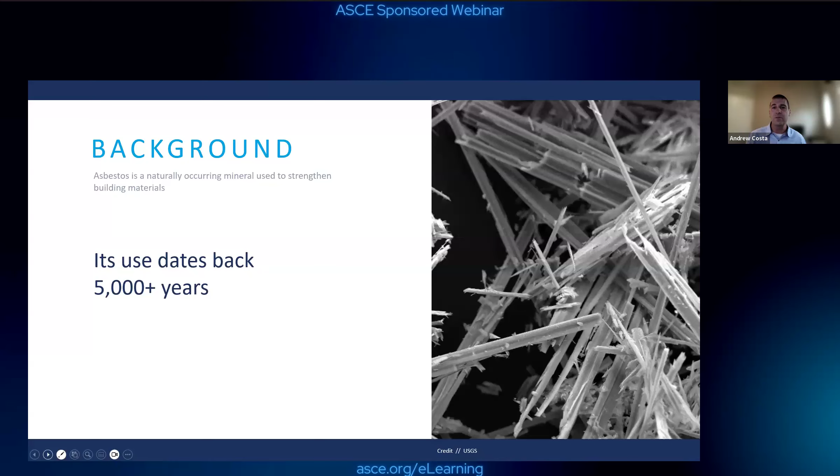Let's go through some background of asbestos cement pipe, or just asbestos in general. A lot of people aren't really aware that asbestos is a naturally occurring mineral used to strengthen building materials. It's been around a really long time. Humans on this planet, I'm not sure about aliens, but humans have been using asbestos about 5,000 plus years. There was a big increase during the Industrial Revolution. As we started ramping up with a lot of buildings, we really started increasing the use of asbestos as a building product.

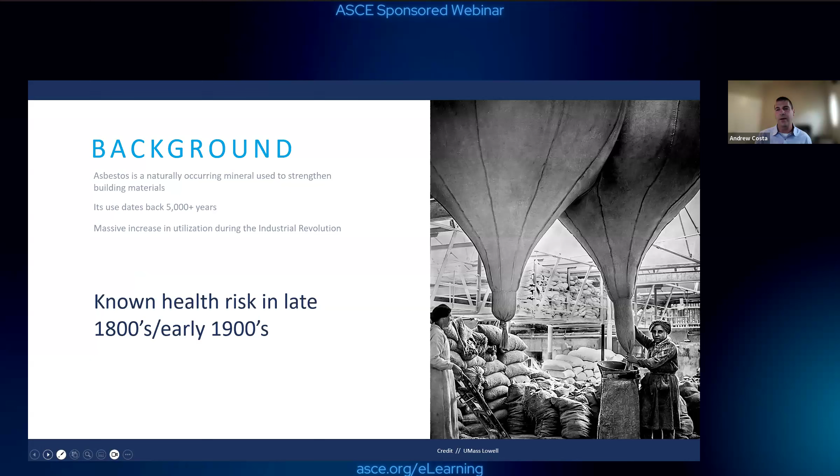Around the late 1800s and early 1900s, we started noticing that it had some negative health things associated with it. So we started figuring it out back then. But as its use continued and ramped up, it was kind of at its peak that we really started fully understanding and studying exactly the negative health aspects of asbestos.

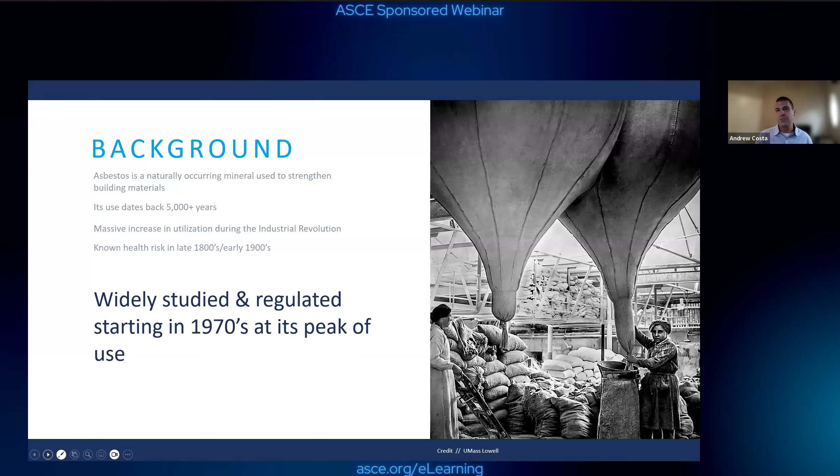So as it peaked, that's when we really started regulating it. If you grew up around the time that I did, these are very familiar terms as it pertains to asbestos. So asbestosis, mesothelioma, and lung cancer, these are all major health consequences that are direct consequences of asbestos fiber exposure, some of which is short-term exposure and some of which is prolonged exposure over the period of several years. So some pretty negative health consequences associated with the material.

Most people these days have a very strong connotation with asbestos being a concerning material. The challenge here for us on the infrastructure side is that about 15 to 18% of our pipelines in the US and Canada are made out of asbestos cement. So that represents over 600,000 miles in North America.

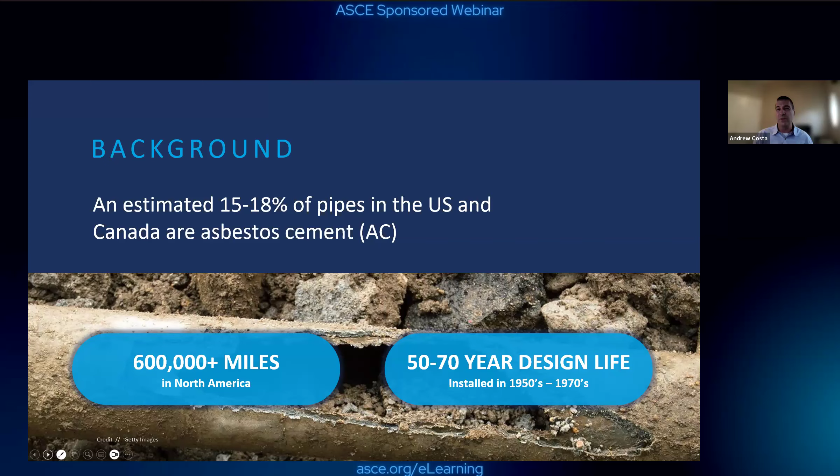And with about a 50 to 70-year engineered design life, these pipes were, again, a lot of installations during the Industrial Revolution. So when you start getting into infrastructure building in the 50s, 60s, and 70s, with a 50 to 70-year engineered design lifespan, we're there right now. And a lot of these pipes are far past their useful life. Some are in very good shape, but most are nearing the end of that life.

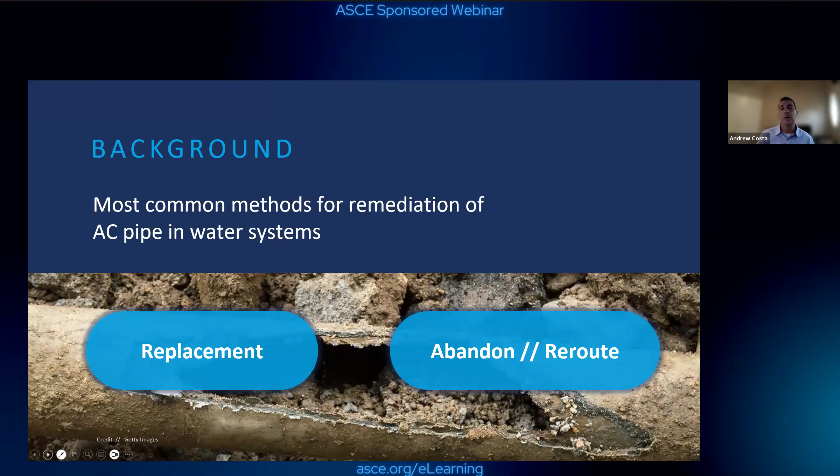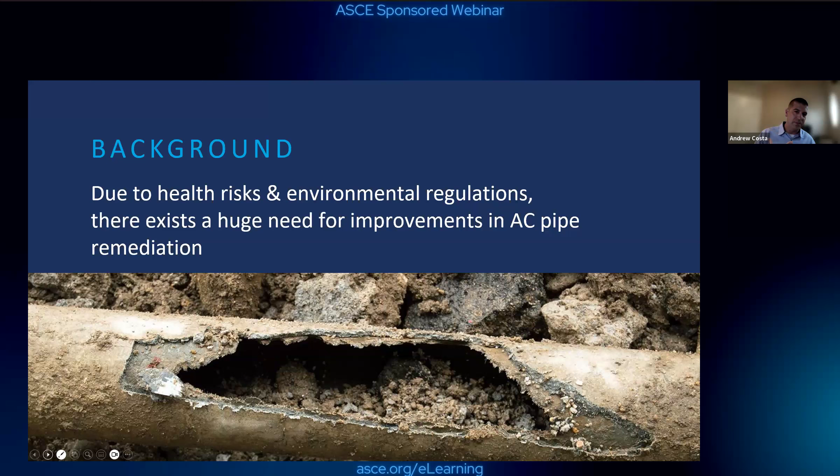Traditionally, up to this point, we've historically handled asbestos cement pipe by either the replacement method or by abandoning these pipes and rerouting a new line. But because of the health risks that we talked about and a lot of environmental regulation out there, we've got a lot of inventory still in the ground. There's a huge need for the improvement in how we remediate our AC pipes. Just like Azuria's thesis, as far as trenchless technologies, we're trying to infuse this trenchless concept into a historically dig and replace history.

So from the regulation side, there is a lot of regulation that comes with asbestos and asbestos cement. From the federal side, you have the EPA, and as an extension of the EPA, you have NESHAP, and we'll talk about them in a minute. We have the Department of Transportation involved when we are moving these materials from one point to another. And then obviously when we're dealing with worker safety and workplace safety, we're dealing with OSHA.

The EPA delegates the authority of asbestos governance and legislation to the states. And from there, what the states do with it is a little bit different depending on which state you're talking about. A lot of states will just take that delegation from the EPA as is. They don't make any changes and they just go about their business regulating the material. They do that through groups like DEQs and DEPs.

There are a lot of different spins on what environmental legislation governs asbestos and the implementation of NESHAP. So some states just take that delegation and they run with it. Others add on layer upon layer of additional regulation that is there to deal with. So some important terms to know.

We talked about NESHAP. So NESHAP is the National Emission Standards for Hazardous Air Pollutants. This is the regulatory agency that manages and regulates air quality, specifically with asbestos. If you think back to where asbestos was primarily an issue, it was in vertical buildings and structures. So primarily it's governed as an airborne or an air quality issue. Again, this is managed by the US EPA under the NESHAP.

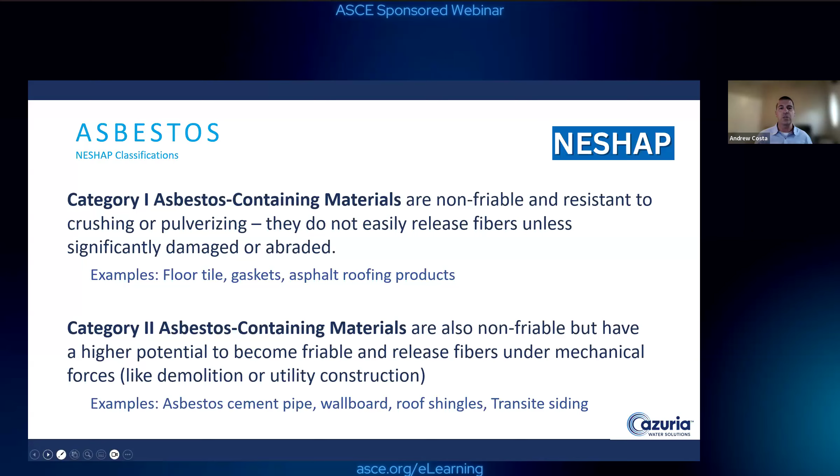These are non-friable materials if you don't mess with them, but they have a higher potential to become friable and release fibers once we start doing construction activities to them. So these are things like transite siding, shingles, wallboard, and for us, asbestos cement pipe materials.

So the NESHAP has very strict work practices when it comes to minimizing or preventing the release of asbestos cement fibers. And that doesn't matter if you're talking about category 1 or category 2. So anything that has been fractured or broken, especially if it's category 2, NESHAP calls that regulated asbestos-containing material, or RACM. And again, it's regulated under the asbestos NESHAP.

If it has two things: if it becomes friable, it's regulated, but it's got to be over 260 linear feet. And I think that's generally within a calendar year. So if you're just remediating a 5-foot section of a pipe for a point repair, that's not going to fall under the regulations of NESHAP. You've got to have workplace safety because you're dealing with hazardous materials. But as it pertains to NESHAP, once we get above 260 linear feet, that's where these regulations kick in.

So if you kind of want to understand, is this material regulated or not? Is it friable? Yeah. Is it over 260 feet? Yeah. It's regulated, right? We call that regulated asbestos-containing material, or RACM. Okay, what do we do about it, right? Let's talk about what the EPA has approved as far as solutions for remediating AC pipes.

On the rehab side, these are trenchless methods. These are EPA approved. We can do CIPP, we can do slip lining, or we can do spray applied pipe. These are partially not disturbed because we're not messing with the majority of this line. We partially remove the ends where we have excavations, but these are trenchless technologies. These are things that the EPA very much likes.

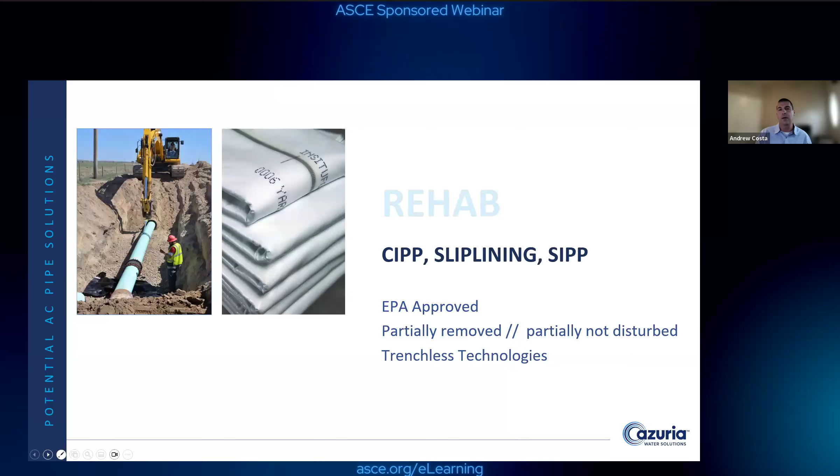So on the direct replacement side, there's a lot of things that come with open cut construction. And this is kind of the value proposition of trenchless versus open cut. It's very disruptive. It tends to be expensive. It does take a lot longer than trenchless technologies. There are a lot of social costs that go with this and a lot of restoration. These are all fundamentals to getting away from that direct replacement type of mentality.

On the grout and abandon side of things, again, it tends to be time consuming and costly. It does leave the asbestos in the ground, which is non-preferred. You're dealing with potential conflicts wherever you're going to lay the new line. Oftentimes, if you're moving that line several feet away or across the street, you're dealing with new permitting, new easement acquisitions. These are things that add to the process. They add engineering fees and time. The environmental results are not ideal.

And if you grout fill and abandon asbestos cement pipe, that's okay for now, but what happens in the future if you need to make some modifications to that area? What if utilities need to be changed or removed or moved? What if that neighborhood grows? There are always changes that we're experiencing. If you now need to cut that area, you can't snap cut it anymore. You're saw cutting through a solid piece of pipe. That is a very dangerous process that will release a ton of fibers in the air. So in essence, it just takes the problem and shifts it down the line.

So we're going to talk a lot about this CTPS process, and I want to give you a little bit of backstory as to how it came to be. It's got some roots in trenchless technology from the pipe bursting community. And the pipe bursting community had been seeking some assistance from the EPA for a number of years through what they were going to call an alternative work practice.

And they needed some alterations or some release from the NESHAP requirements because the process didn't meet all the requirements to the letter of the law. And because that process had been denied, it's not an approved process right now. And so we were on a project in Greenville, South Carolina. It was a shallow pipe bursting project.

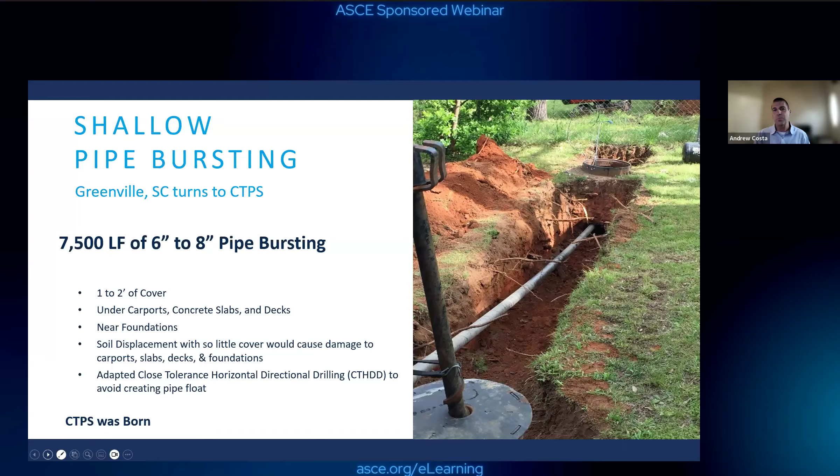So let's talk a little about, we call it close tolerance pipe slurrification. Unfortunately, there's not a more smooth version of how to call this thing. That's just what it's called. So we call it CTPS for short. There's a few things that I want you to understand before we dip into what CTPS is. So if you're tuning out or if you're multitasking, I really want you to focus in on a couple key things on this process before we dive into it.

Number one, it has federal EPA approval. So it does have this alternative work practice to NESHAP that we had talked about that the other communities didn't have. This is the only EPA alternative work practice that exists. It's literally the only one. It does have an ASTM standard, and it does have installations in multiple states.

So what is it? What is CTPS? CTPS is the only EPA approved trenchless method for replacing asbestos cement pipe. It's a trenchless technology, right? That's what we do. It's actually very simplistic in nature. It uses a lot of very common trenchless ideas and equipment that's been around for a long time. So it uses directional drilling equipment and it uses bentonite drilling mud, very familiar materials in the trenchless space.

What it does is it combines the drilling mud and the asbestos, turns them into a slurry, and it pulls it to a pit where it's hauled away and can be disposed of. And what that does is it allows us to remove and eliminate leaving friable asbestos cement pipe in the ground. We can do that for pipelines that are 4 inches in size to 20 inches, and we can upsize at least one size and sometimes two, depending on diameter.

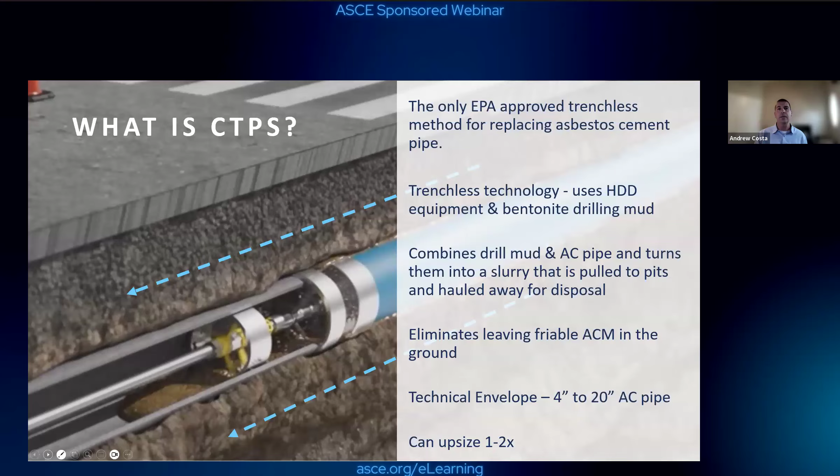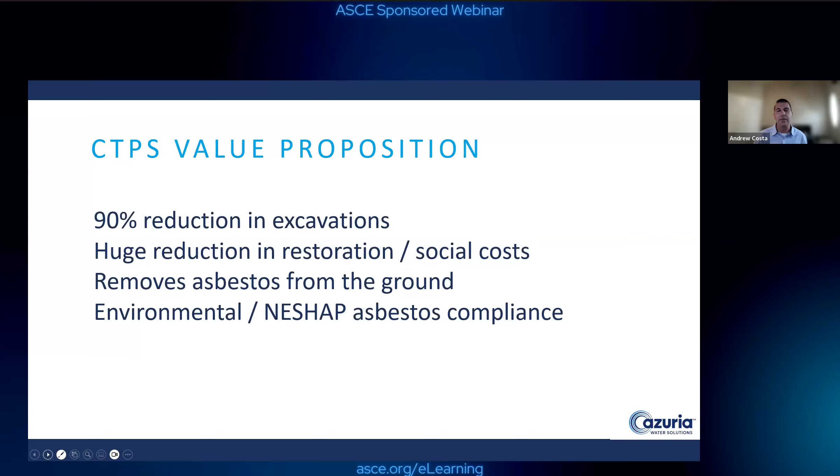So the value proposition for CTPS is very similar to what a typical trenchless value proposition would be. Because remember, we're applying trenchless to a traditionally open cut type world. We are reducing excavations by about 90%, sometimes more in many cases. There is a huge reduction in restoration and in the social cost because it tends to be a faster process. It gets the asbestos out of the ground and it has compliance with EPA and NESHAP regulations. So it's a very environmentally friendly process.

So from a work sequence side of things, I'm going to walk you through all of this real quick. We have to dig access pits on either side. So I know this is a trenchless technology, but it's not a pitless technology. We're in pressure environments, so we do have to get access to this pipeline. So we're going to dig excavations on either side, and we're going to make very small intermediate excavations at the service connections or at any tees or valves that we come across on the alignment.

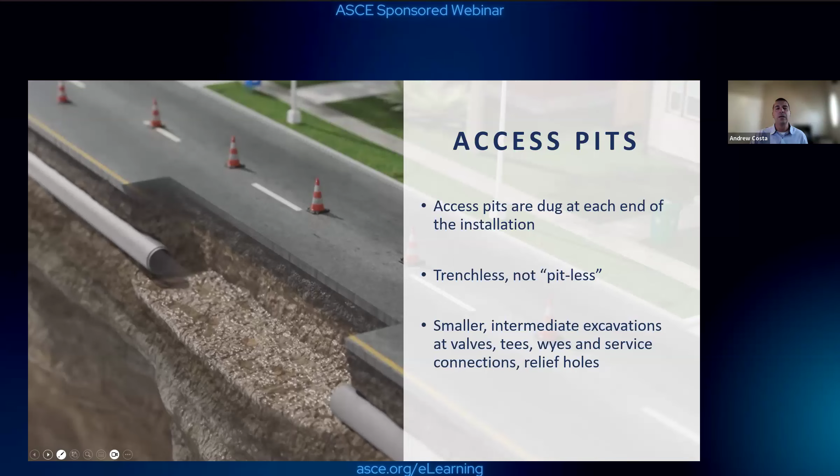We're going to use those for relief holes. I'm going to show you an animation of this here in a minute, so it should make a little bit more sense visually. The next thing we do is we push our drill rod from one end to the other. Once that's in place, we start to attach our tooling to it, and I'll show you what that looks like here in a minute. Once that tooling is there, the train is going to spin and it's going to do its thing and start the CTPS process.

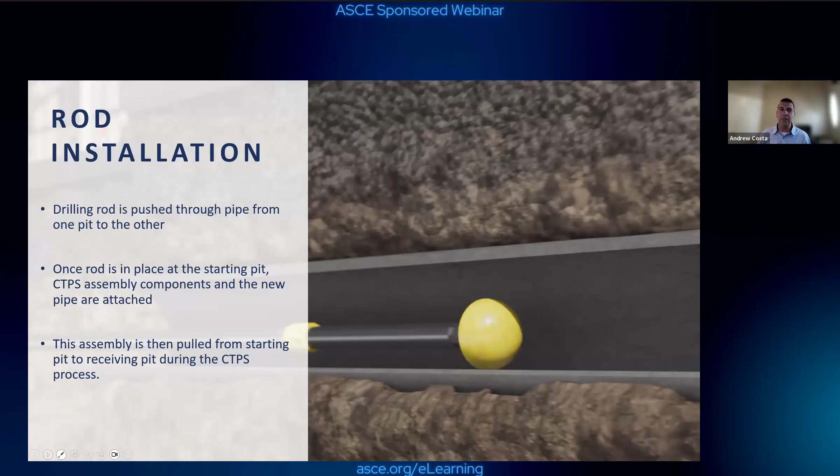So here's what the tooling looks like. So here is your bad asbestos cement pipe that we're going to get rid of. The first piece of tooling that we attach is a guide reamer, and this is basically just what it says. It's going to guide our process along with the alignment of the pipe. We stick with and we use the existing alignment. So this will help us keep centered in the pipe. It'll help us follow any jogs in that alignment and help keep us centered.

The next piece is really important. This is the back reamer, which is a fancy name for a cutting head. This also will spin. This is where the bentonite drilling fluid will be injected, creating a wet cutting environment. On the back end of this, there's a pull head with new fused product pipe on the back of this. This is the new product pipe that's going to be pulled in during the process.

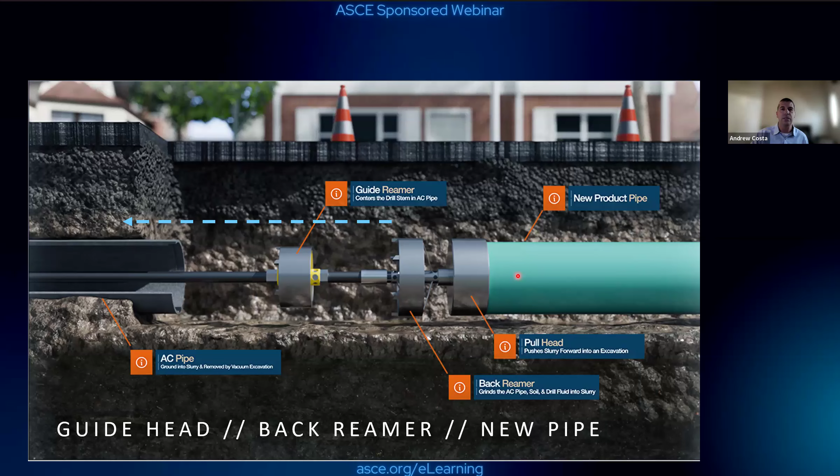So we're going to see an animation, we're going to walk through this. And even though I've explained it in a series of steps, all of this is happening at the exact same time. So it's one continuous process. One of the important things to note is that we're taking a little bit of soil with us during the process. So the term close tolerance,

our tooling is sized to where we take about a half an inch of soil around the outside diameter of this pipe. So when we inject our bentonite drilling fluid, we're going to be creating a slurry with the drilling mud, the asbestos cement pipe that we're grinding up, and a little bit of earth. This is going to combine to form a slurry that's going to be kind of pressurized. This environment that we create because of the close tolerance creates some pressure. It helps us pig or kind of squeegee this material from where it's created to the end of the pit, while pulling in the new fused pipe at the exact same time.

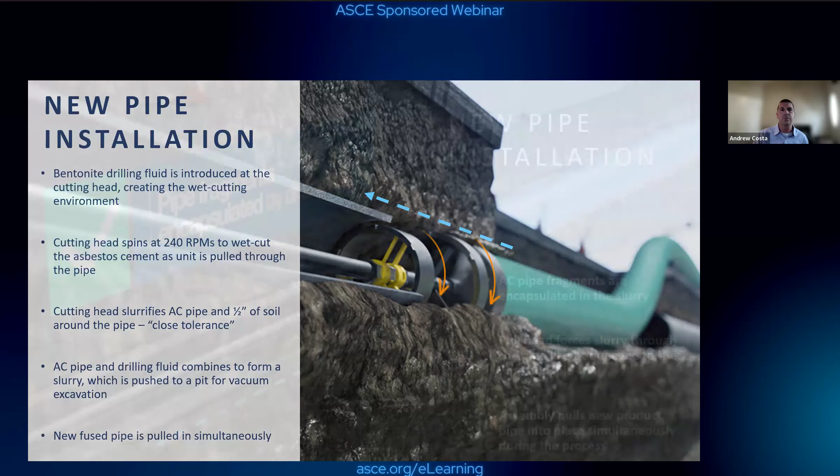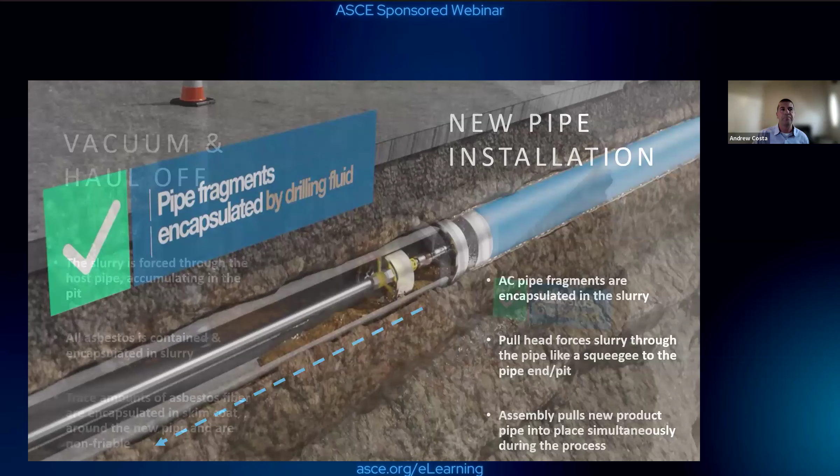The cutting head is going to spin at about 240 RPMs, and all this process is going to happen at the same time. So I want to show you an animation of kind of what that looks like. The important thing to note on this process is that the asbestos fragments are encapsulated in the slurry. So all of the material that we're dealing with now is encapsulated, right? That pull head is flat. It's going to force that material like a squeegee or a pig to the end, again, pulling in that new product pipe. Once it gets to that end excavation, it's going to accumulate.

Again, it's all encapsulated. The material ends up being like flowable fill. If you're familiar with like low strength grout or flowable fill, that's exactly what the material has the consistency of. There are trace amounts of the material that will be left behind. So the process gets about 98% of the material out. The trace amounts that are left over, and it's a very, very thin amount, will actually harden again to become non-friable and are encapsulated in that skim coat that we've created with the drilling mud.

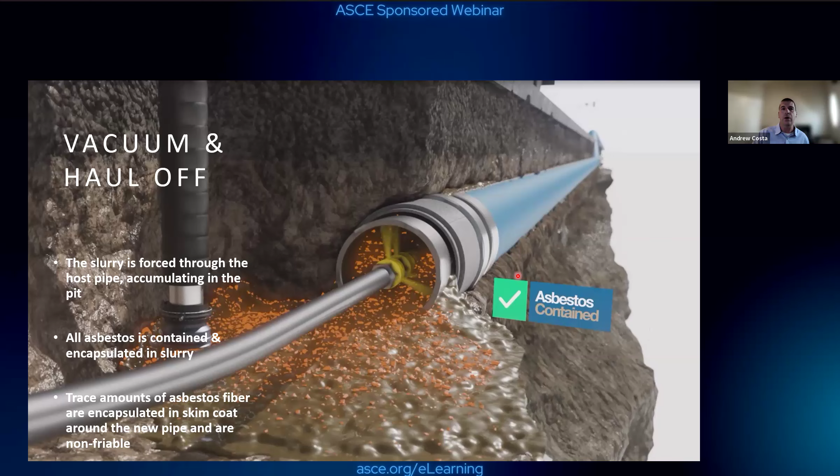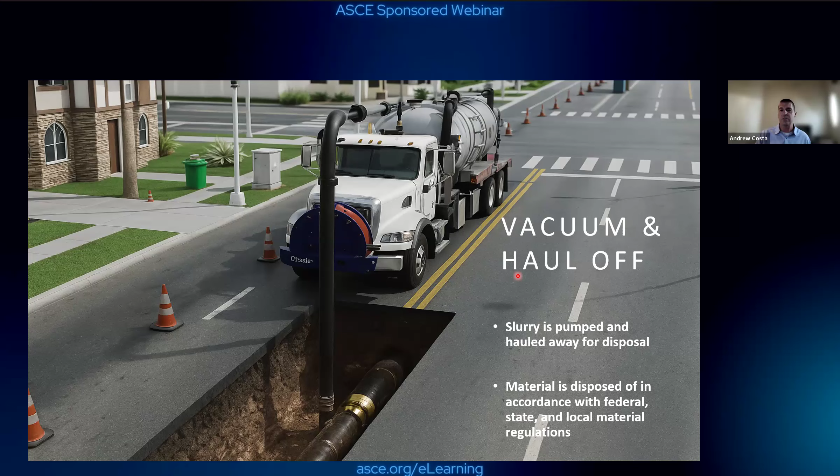Once that stuff is all into the pit and all of our slurry has been kind of accumulated, we will vacuum it out and we will haul it away and dispose of it just like we would with solid sticks of asbestos cement pipe according to all the federal and state and local material regulations.

So I'm going to start an animation for you that hopefully should paint a better picture of what the process looks like. I'm going to jump ahead. There's a lot of words at the beginning of this. So let's dive into the process. So if you remember, we're talking about pressurized pipelines. These are not gravity lines. These are pipelines under pressure. So we have to get access to them. So here's a cutaway of your bad asbestos cement host pipe.

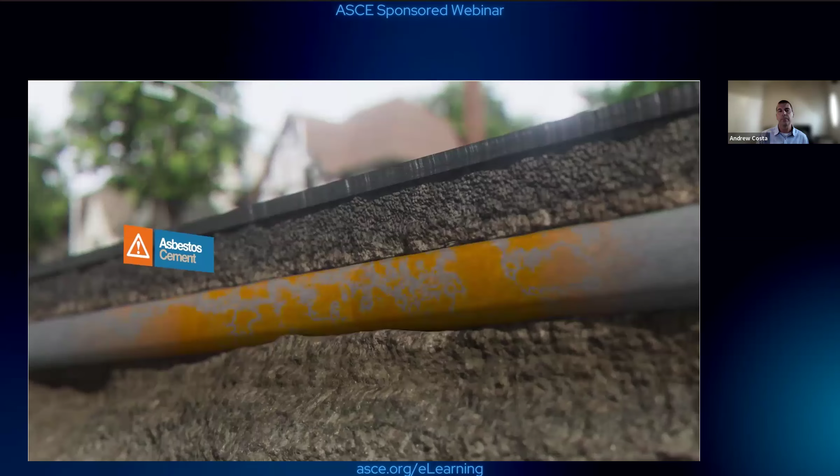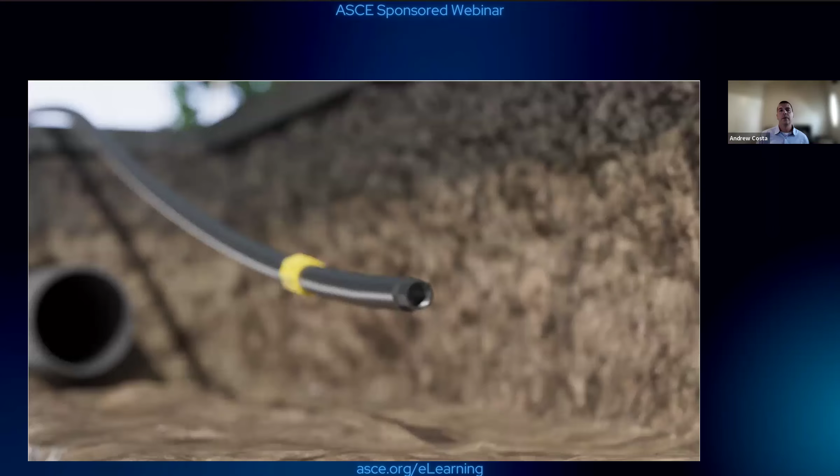We are going to dig 2 excavations, one on either side. Depending on the size of the pipe, we may have a little bit larger excavation than another, but generally about 10 to 15 feet in length. So we do one on either side. Then we take our drill rod from our HDD rig and we're going to push that from one end to the other. Now it's here where we want to start our process.

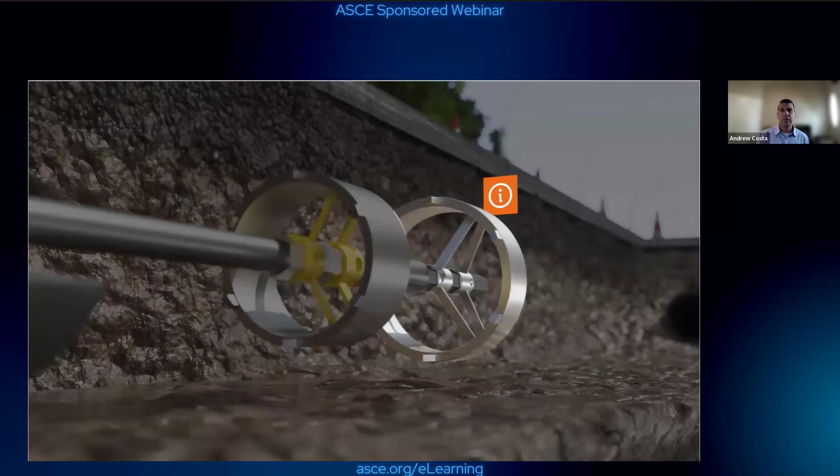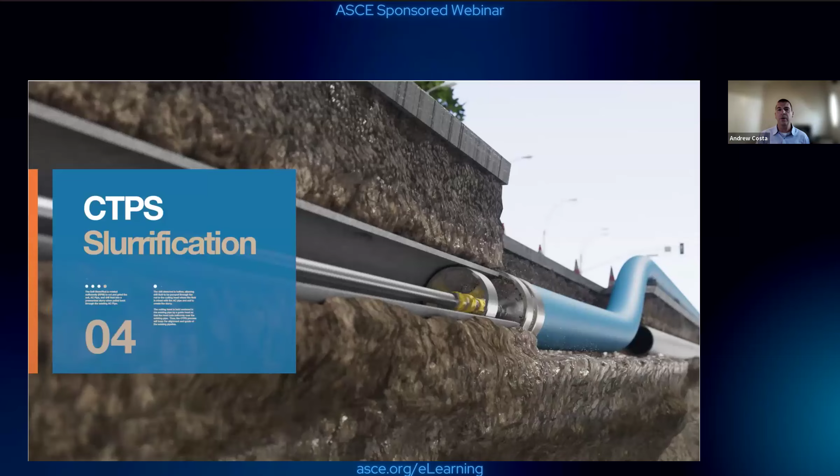We attach our tooling. So here's our guide reamer. Here's our cutting head. And then here is our pull head with our new fused product pipe. So the end result of this is going to be a brand new pipe. So again, it spins at 240 RPMs. Here's your bentonite drilling mud that's being infused into there. It is going to wet cut and grind up this asbestos.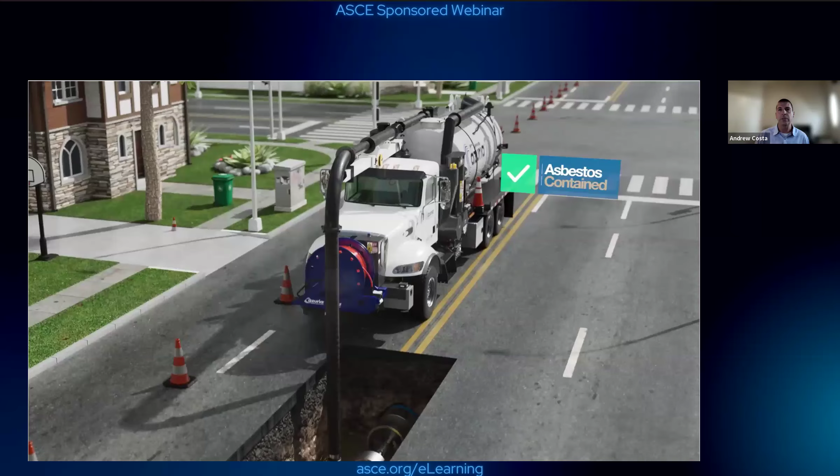Again, about half an inch of earth along with the asbestos, and the drilling mud will create this slurry that will be pressurized and kind of pigged and pushed from one end to the other, all while pulling in this brand new pipeline with it. So again, once that material is all pushed to the end of the pit, it's all encapsulated in our slurry with our drilling mud. We are going to vacuum it out and we are going to haul it away. So it's a very neat and very economic process.

Once that process is done, we are going to reconnect our services. We're going to put our pipe back together, chlorinate, disinfect, if it's a water system, and put everything back together again. And you've got a brand new pipe in its place. So it is a replacement technology, again, approved by the EPA. We are getting rid of that asbestos cement host pipe, and we are pulling a new product pipe in its place. So it is a replacement technology.

So timeline-wise, remember we said regulation of asbestos started back in the 70s. We're going to jump ahead to 2019 and the alternative work practice that we mentioned. So on that job that we did in the Carolinas, we worked with the EPA and we kind of worked through this process with them. We had a lot of input as to what needed to be done to be in full compliance with the asbestos NESHAP. And so we checked all of the boxes, answered all the questions, solved all the problems that needed to be solved.

And in 2019, we were approved for the alternative work practice for CTPS. It is, again, the EPA's only alternative work practice. And in that document, they consider CTPS as a direct equivalent to open cut, dig, and replace. This is in the Federal Register, so there's the number right there. You can look it up. There's a link to this document in the chat. You can go there and see all of the information that's involved with the work practice. It's a very lengthy document. I think it's like 60 pages long.

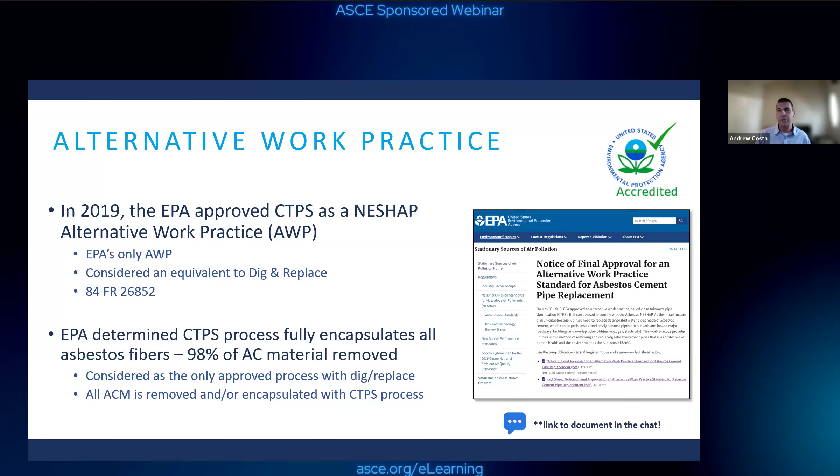But in that work practice, there's a lot of information, some of which talks about the encapsulation. And so the EPA determined through testing and through working with us that the CTPS process fully encapsulates all of the asbestos fiber. And 98% of that material is getting removed from the ground. So again, they are considering this the only other approved replacement process along with dig and replace. And they consider all of that asbestos cement material to be either removed or encapsulated during the process. Those are very, very important designations that have to be fulfilled in order to get something like an alternative work practice.

Fast forward a couple years, and the EPA wanted to issue some guidance. They issued a memo, and it was basically a clarifying memo, and they wanted to outline a handful of things, basically some do's and don'ts as far as what they approved and what they didn't. On the approval side, they wanted to clarify, right? We've got this new process. They want to make it clear and go on record that there are two approved AC pipe replacement methods. One is open cut construction or open trench. Two is our close tolerance pipe slurrification method.

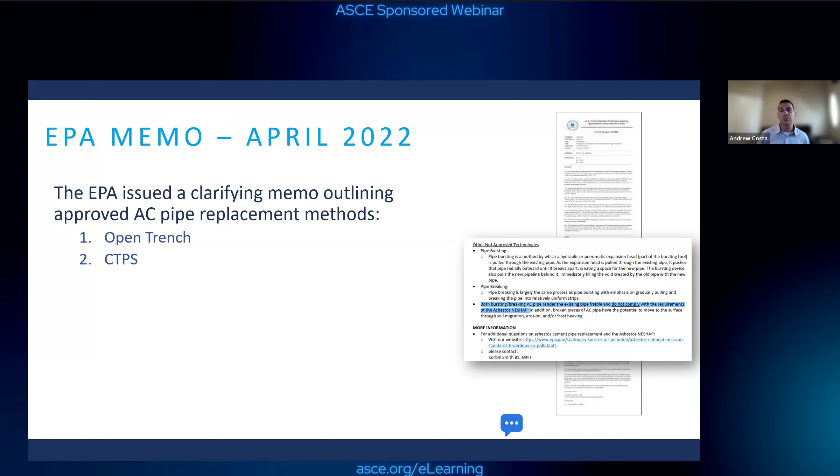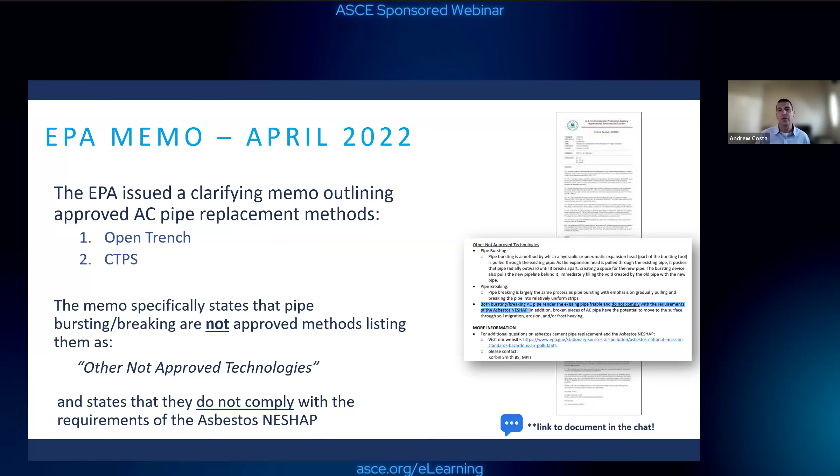They even go along to say, all right, let's talk about what's not approved, right? There's a section in this memo that they call other not approved technologies. And they list that pipe bursting and pipe breaking are not approved technologies because they do not comply with the requirements of the asbestos NESHAP. So they felt like they needed to clarify this. So they issued this memo as some guidance to both the federal level and for the adoption at the state level.

Fast forward another year, the ASTM for CTPS was worked through and approved. This happened in 2023. And just like an ASTM for any of the other trenchless technologies that are out there, whether it's pipe bursting or CIPP, it's a standard, right? It's a way to standardize and document a lot of the things that are really important and fundamental to the process. There is a lot of redundancy in our ASTM with materials handling and NESHAP requirements.

So if you were to read cover to cover the ASTM and read all of NESHAP, and you were to read our alternative work practice, there is a lot of crossover and carryover because there's a lot of that data that's the same and a lot of those processes that carry from one to another because they're all fundamental to making sure that we meet regulations. So there's material testing information in there. There's record keeping information. There's just a lot of guidance as to how you do the CTPS process, do's and don'ts, testing, record keeping, Q&A, things like that.

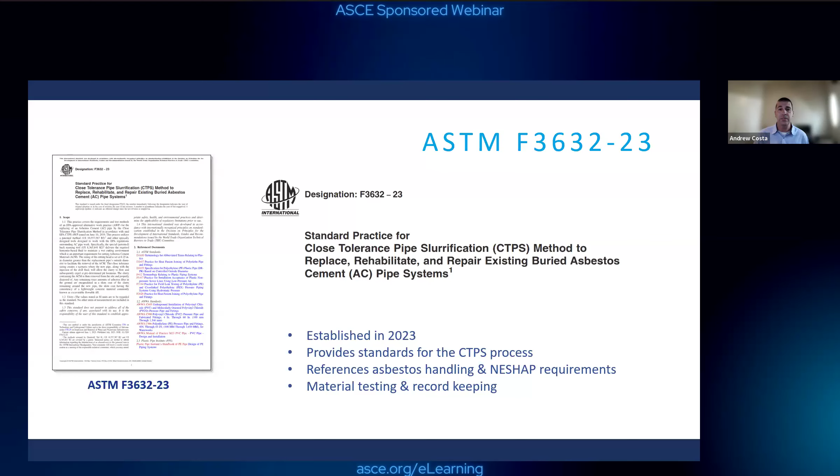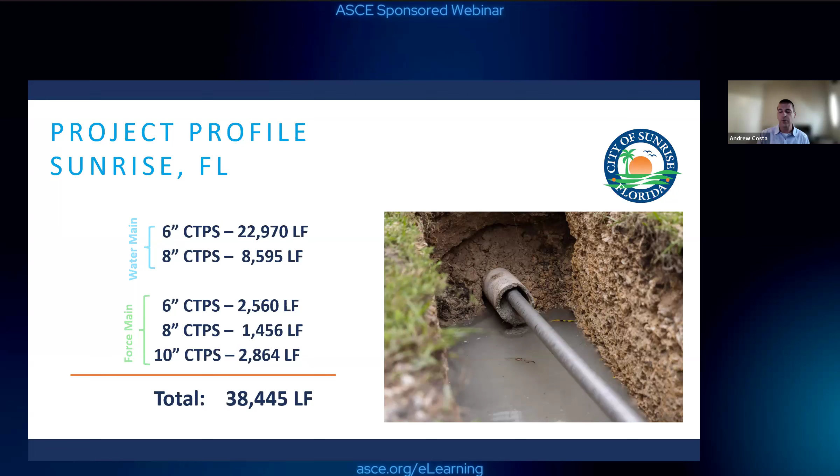So fast forward again, if you want to see some real world applications, there is a project currently underway in Sunrise, Florida, that's about 38,000 feet of both potable and force main AC pipe, 6-inch, 8-inch, and 10-inch, mostly water, but a little bit of force main. I want to walk you through that job, but first I want to show you what a typical, especially here in Florida, residential CTPS setup looks like, right?

So like we talked about, we're going to dig a couple of pits, one at the start of the process and one at the end. And we are going to surgically just dig at valves and service connections. We're just going to make very strategic excavations. We can choose most of the time where we put our termination pits, and we can move these to make sure that we're staying in the green space.

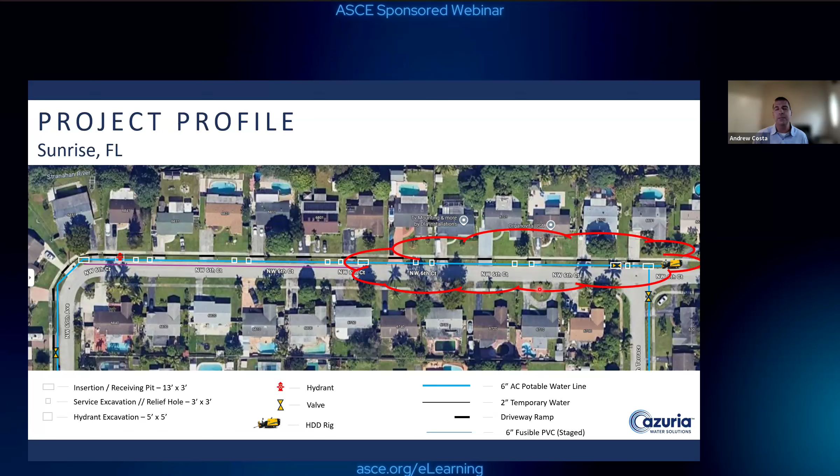Because if you were to open cut all of this, you've got 1, 2, 3, 4, 5, 6 houses in this run. That open cut goes directly over all 6 of these guys' driveways. So now we've got 6 driveways to restore. This alignment sits in the green space, so restoration on the CTPS process is very minimal. There's no sidewalk cutting, no road patching, and no fixing of everybody's driveways. So the restoration and social costs are quite a distinct comparison to open cut construction.

So let's take a look at our City of Sunrise job. Here are some typical pictures of what this job site looks like from a real world perspective. So here is our directional drill rod that's staged right here. Here is one of our pits. This is where the material will collect on this job. But you can see, pretty minor traffic control. If you look, you can see some excavations. These are all green space excavations.

So there's a driveway here, there's a driveway there, there's a driveway there. We're not digging in any of these driveways. We're not open cutting through this. We might have a little bit of roadway restoration right on the side here of this excavation, but no impact to the sidewalks, no impact to the residents other than they're going to be on temporary water for a couple days.

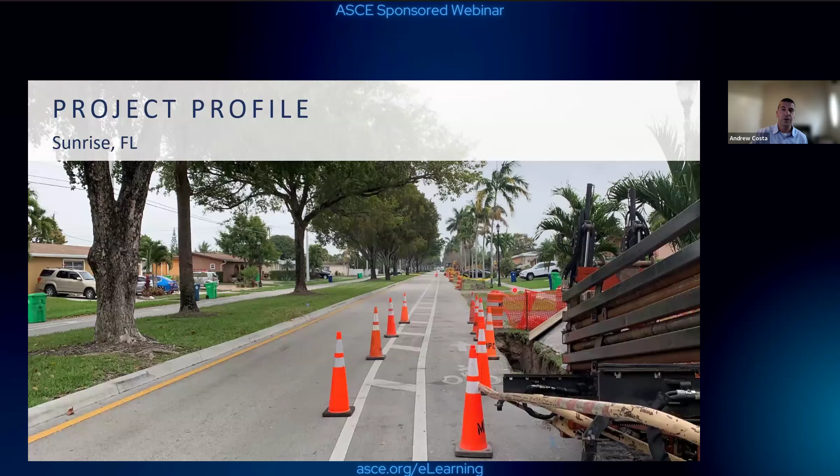They're going to have some road ramps here as we set up our temporary water. So the inconvenience for these guys is really just backing over a slight road ramp on their driveway. No open cutting through here, no unsightly restoration efforts that are going to mess with the beautification of their driveway. And we do this strategically. So throughout this neighborhood, we said on a 500-foot run or a 450-foot run, you've got 6 driveways to contend with. That adds up really quickly over a 40,000-foot job.

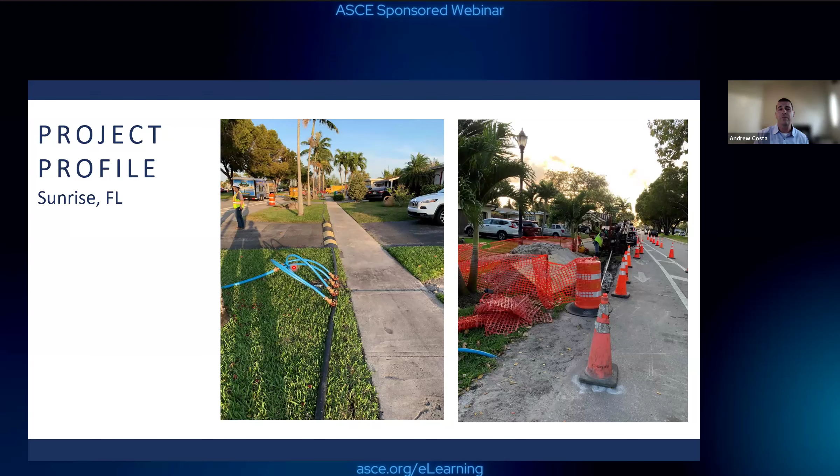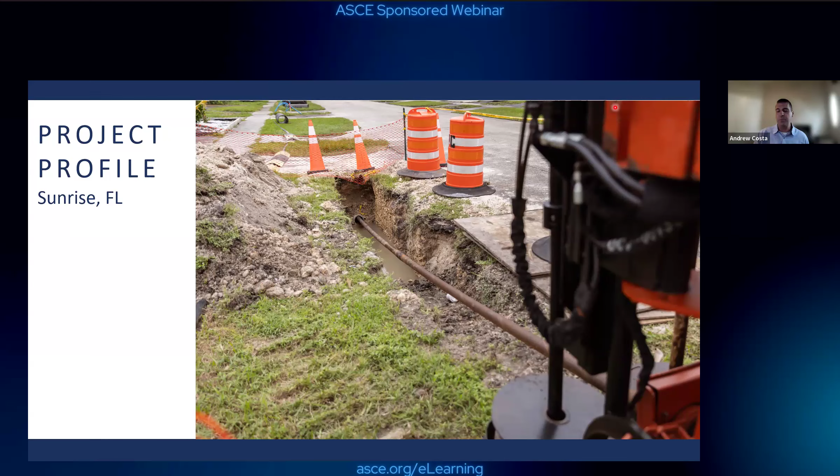So here's a little bit of a view. There's our drill rod that is staged inside of the asbestos cement pipe, and this is going to be pulling the material. This is where the material will accumulate into this pit. Right now, because this is the beginning of this run, you can still see what we're talking about. After a short amount of time, material will accumulate in this pit and it will start to fill up like you're filling a bathtub with water.

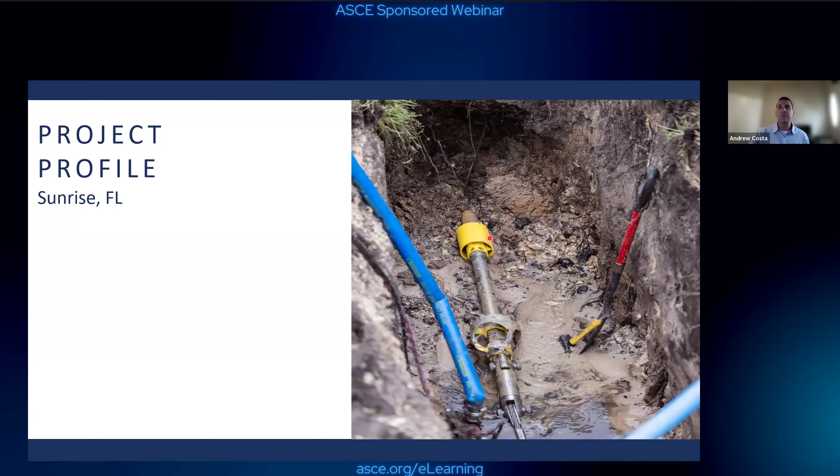If you go down to the other end of the pit, this is the start of what we're talking about. This is where our tooling is set up. This is where we will stage our head that will keep us centered in the pipe. This is our cutting rod. I'm sorry, this is our drill stem right here. This keeps us centered in the pipe. This does all the cutting so that we can stay with that alignment. We attach our new product pipe on there. We can do fused, so fusible HDPE, fusible PVC or fused HDPE, but it has to be fused pipe.

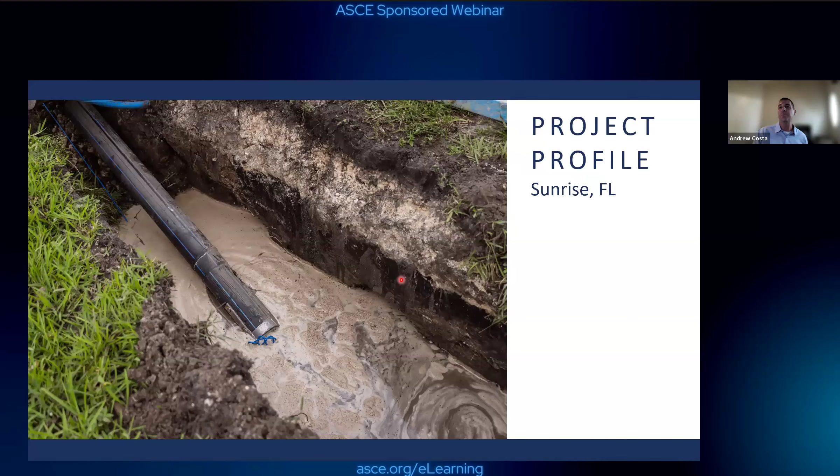And then these are some shots of what it looks like getting that material staged and into place as it goes through the process. And then as that slurry starts to move from where we're creating it, as we grind up that asbestos cement pipe, and as we pull it to that end excavation, that material again starts to flow out. Again, it has the consistency of a flowable fill or that low-density cellular grout. And eventually this pit will fill up with material, and then we will just be working in more of a subaqueous environment of slurry.

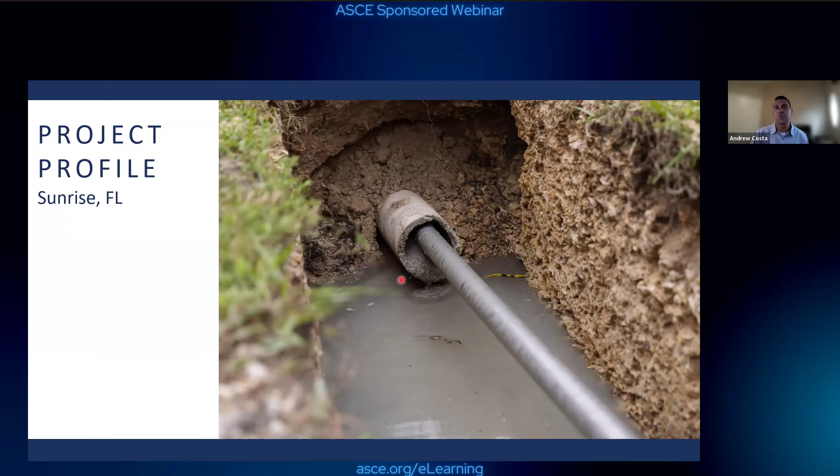So as far as what it looks like when you start and what it looks like when you begin, here's kind of what that looks like. Here's the component that keeps us centered in the pipe. Here is our grinding head. And as that moves along through the pipeline, through the alignment, you end up with basically just an excavation full of concrete. That concrete, if you were to go on vacation and come back to it, will set up and reharden and become non-friable, and you will have a giant concrete block inside of that excavation.

From a materials handling perspective, that tends to be a good thing, right? We do like to handle the materials right away when they are flowable and in a slurry type of consistency. But depending on the waste disposal group that we're working with, oftentimes they will put that into another containment, like a bin or a dumpster, and they'll let that material solidify. Oftentimes they will wrap it with plastic and they will bag it and tag it just like we would if we were removing full sticks of pipe.

So depending on the location, what that waste management company prefers, and maybe what the ultimate disposal site prefers, there are a number of different options as far as materials handling, but this is a material that will reharden and become non-friable again. So again, if we were to walk away from this, this will harden back into a giant solid block of concrete.

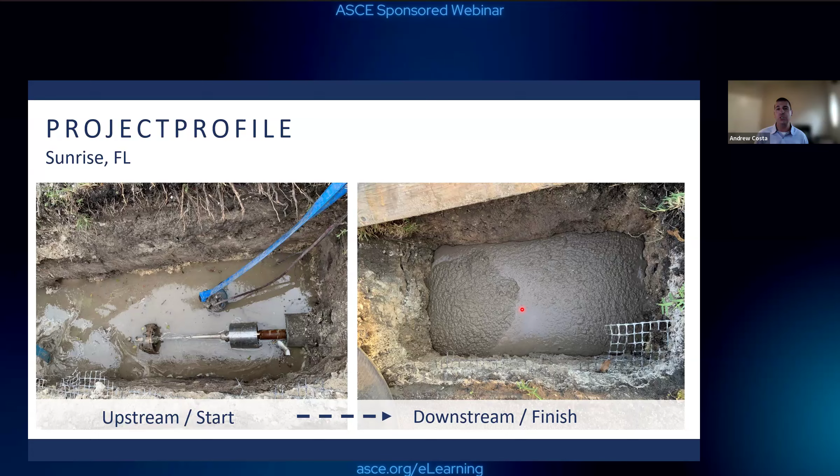So we mentioned very small excavations. In a potable water system, we do disconnect those service connections, and at those service connection disconnects, we have very small excavations. We will use some of these as relief holes. With our close tolerance of only a half an inch of soil being taken around that pipe, it does pressurize that environment. It helps us pig or pull that material from where it's being generated to the end.

But during that process, we do have little relief holes that we designate. We just sleeve a little piece of pipe down there, and we can use that to vacuum out and help relieve some of that pressure during the alignment. And we will do that sometimes a couple of times during one of these runs to just alleviate some of the pressure that gets generated during this process.

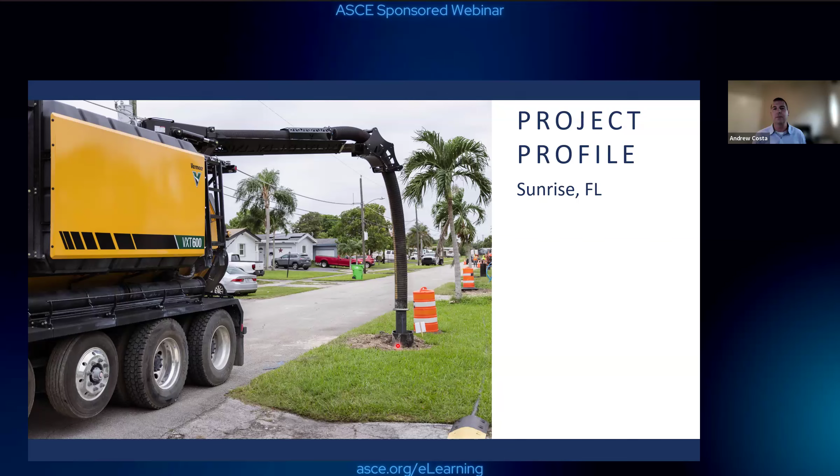Once all that material accumulates in that end pit, we are going to vacuum it out, haul it away, and dispose of it according to the local regulations.

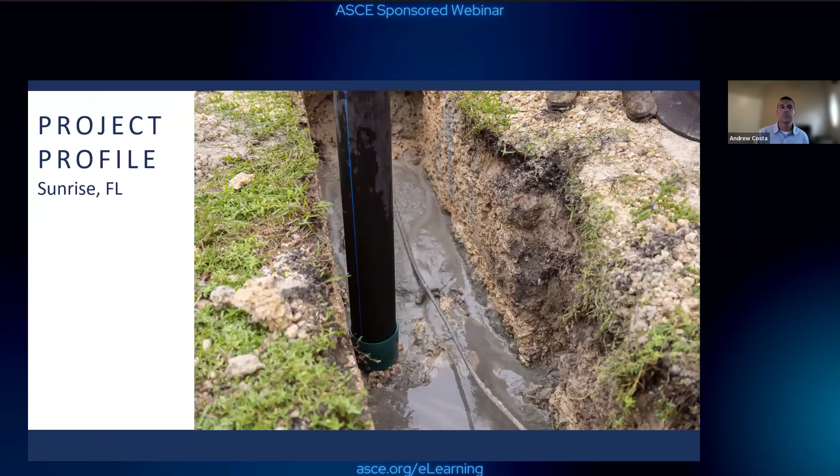So CTPS has a lot of advantages, right? We talked about the environmental regulation and the compliance side. So we've got full compliance with NESHAP and with EPA regulations. And like we said, we are the only trenchless replacement method that's approved by the EPA. Lots of environmental advantages over non-approved AC pipe replacement methods that make pipe friable and leave it in the ground.

Tons of restoration and cost advantages over open cut construction. Remember what we said, we're eliminating or reducing open cut construction by about 90%. That's a huge deal from a disruption side of things, and it really speaks to the trenchless technology thesis of how it differentiates from open cut construction and the disruption that we save from that remove and replace or reroute type of approach that's kind of been done up to date.

Because we're using the existing alignment, we're not worrying about new utility easements, so the design and the planning of these jobs tends to be a little bit more simplified. We're not having to acquire new easements. We're not dealing with alignment issues. We are just following the existing alignment of that original pipe. And we're getting that asbestos cement out of the ground.

So if you're talking about good, better, best, the EPA does allow you in most places to leave that asbestos cement pipe in the ground if you grout it and abandon it. But obviously the preference as far as good, better, best is to get that material out. Our inventory of AC pipe is in such bad shape these days that the EPA considers some of it as a friable material, even though construction activities haven't been performed on it.

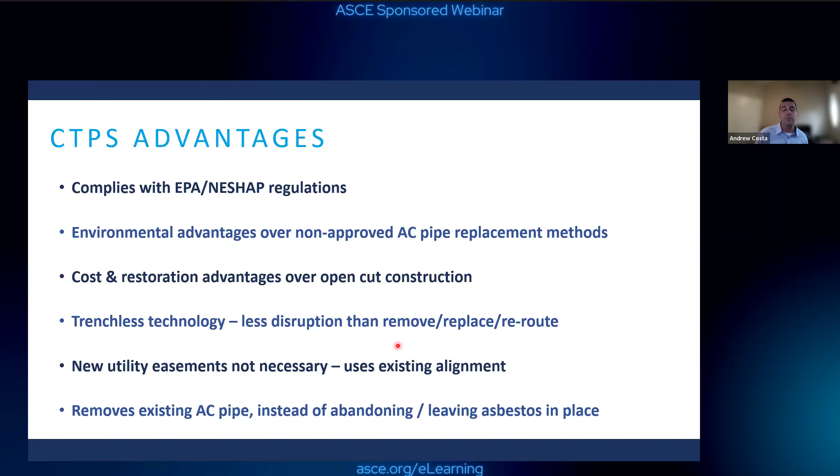So to sum up before we get to some questions, again, CTPS is the industry's only EPA-approved method for the trenchless replacement of asbestos cement pipe. It's got a lot of advantages, right? We talked about the differentiator from open cut construction on the restoration side, the efficiency side, the social costs. There are a ton of benefits of going trenchless in general over open cut construction, but particularly with the CTPS process as it pertains to the dig and replace method.

There are a lot of municipal owners and engineers that are starting to implement CTPS in their AC pipe removal programs as an alternative to dig and replace or rerouting projects.

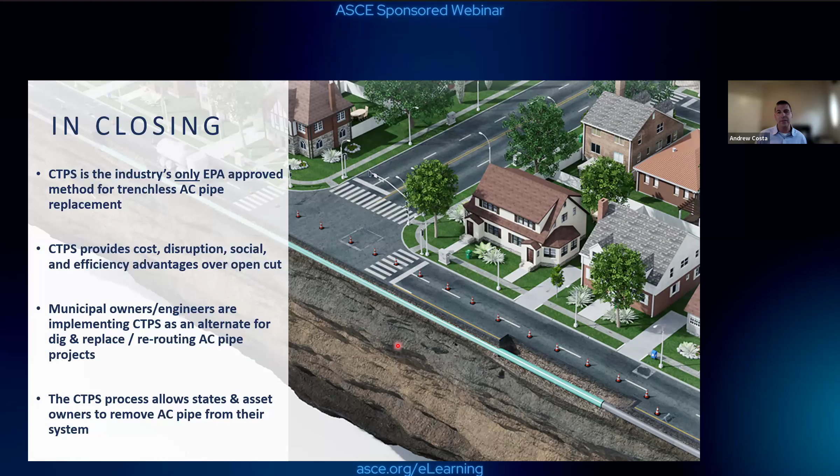This process is allowing states and municipal asset owners to remove AC pipe from their system and do it much more efficiently, cost effectively, with way less disruption than the open cut and replacement methods.